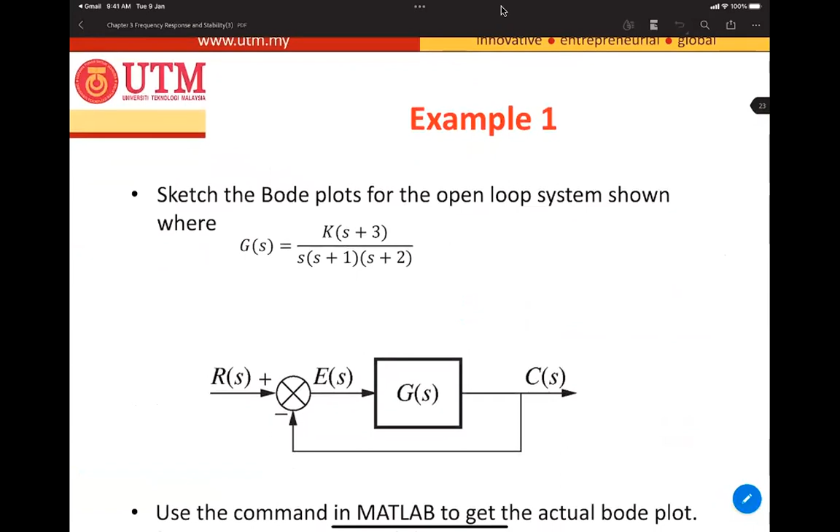Anyway, let's move to slide number 23. So these are examples of very open questions. You are given mathematical models as shown here, which is an open loop. Okay.

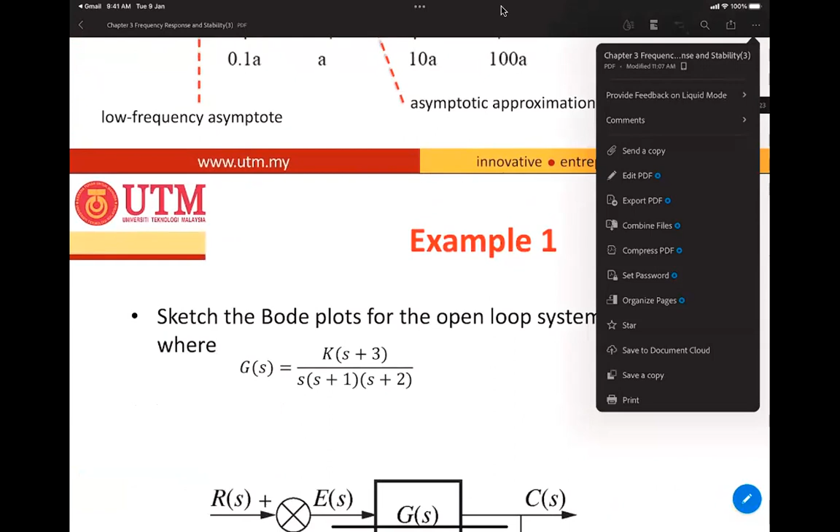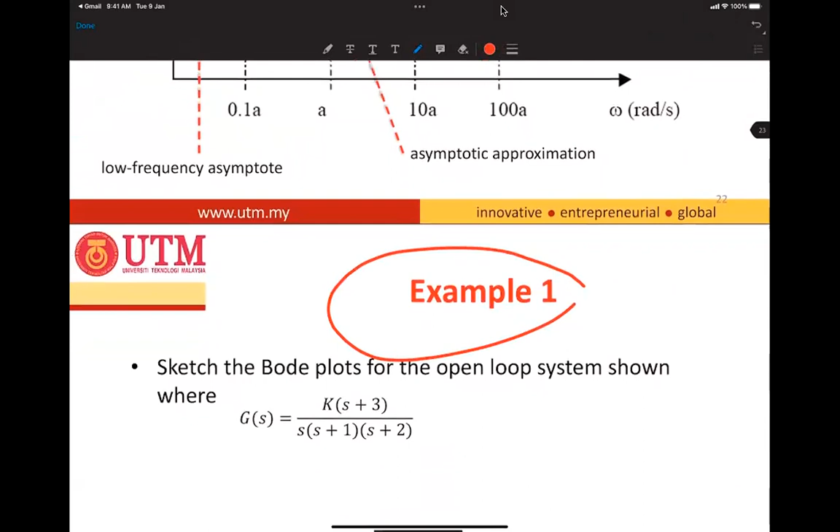Example 1. You can print the slide, or if you don't want to print, you can use your iPad or your phone, the last minimum resource that you have. So this is the open loop transfer function. Can you see behind me? Okay, clear.

We have open loop zeros at -3, and open loop poles at 0, -1, and -2. So look at the poles at the origin, it indicates system type 1.

System type 1, meaning the velocity error constant is kV, and the steady state error is 1/kV. So you must understand the concept when you're given open loop transfer functions.

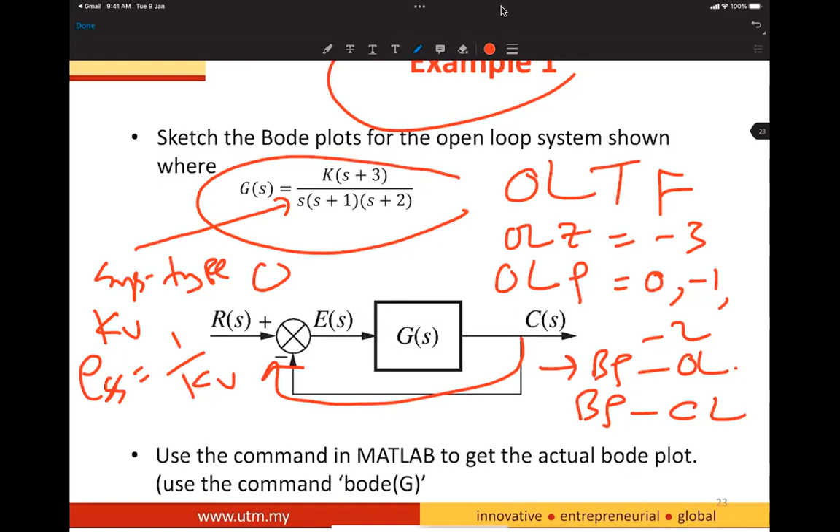We have two types: one is for open loop, the other for closed loop. Open loop will give 5 important pieces of information. Closed loop will give 3 important pieces of information.

So in the test and in the final exam, you are not required to plot the Bode plot. The Bode plot is given. If they ask you to plot it, it's just a sketch, a freehand draw. For example...

Sketch the Bode plot for the open loop transfer function below: 1 over s plus 10. Sketch, a simple one. Sketch means a freehand draw.

Sketch is not the same as draw. When the question asks you to draw, it means you have to use a full scale, a semi-log paper, which must be given. It's like a graph, like a linear graph, but it's not exactly a linear graph. We call it a semi-log paper.

Okay, this one is for draw. Sketch is a freehand draw, like this. That's why you can observe my handwriting, it's not nice because a doctor's handwriting is always not nice.

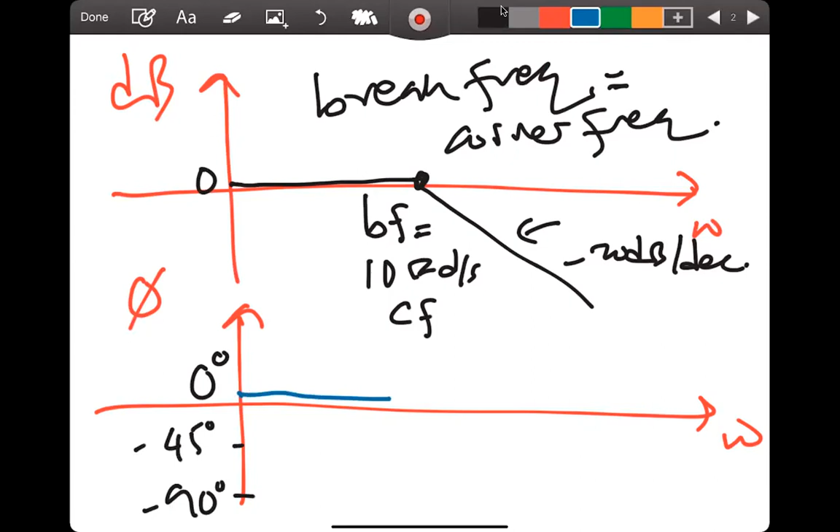But for the phase degree, so you plot 45 degrees, something like that, and then you choose another color. It goes like that, goes down like that, goes like that.

Corner frequency for phase is at minus 45 degrees at corner frequency 10 radian per second, and 1 decade before 10 radian per second is 1 radian per second, and 1 decade after 10 radian per second is 100 radian per second. Log scale. Frequency is log scale.

You can see it here. There's an empty table if you want. Right, that is a sketch.

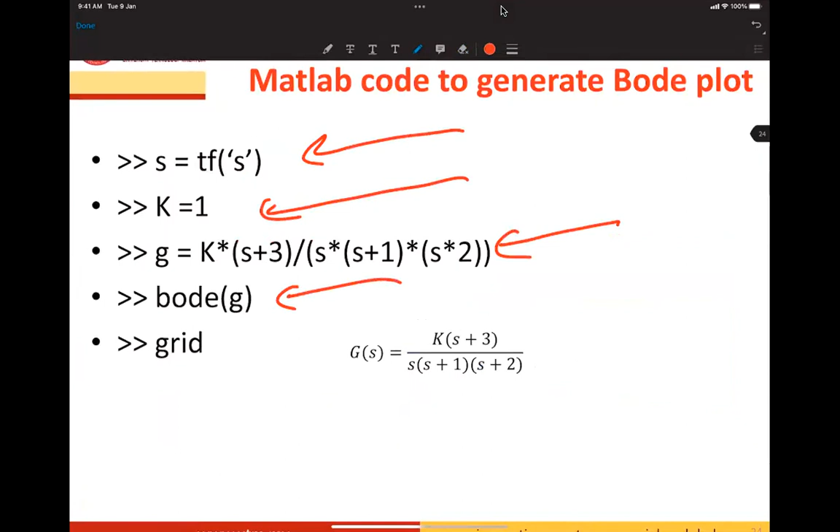So now you are given this plot. We plot it using the code. Assume k equal to 1. Then write the open loop transfer functions, and then call the function bode g and then grid for these open loop transfer functions. Then you get this.

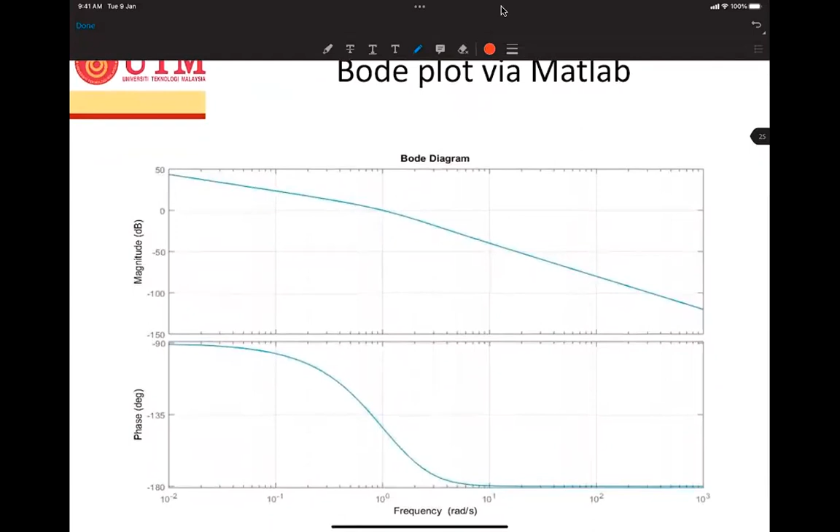So this is the bode plot for the open loop transfer function type 1. If the transfer function is type 0, the initial magnitude will be flat at 0 dB per decade.

But if the system is type 1, it is like this, the initial slope is minus 20 dB per decade. That is the tip: if the initial magnitude is flat, that is a system type 0. If the initial magnitude has a slope of minus 20 dB per decade, that is a type 1.

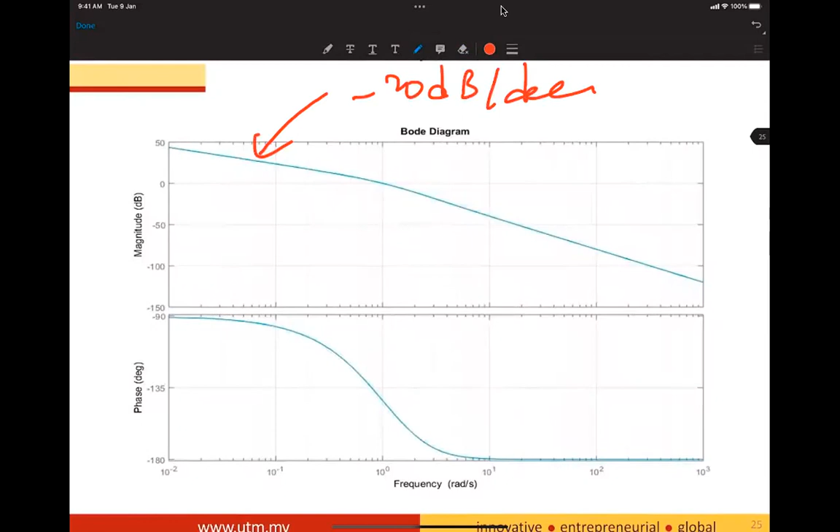But if the initial slope is like this, minus 40 dB per decade, that means this system is system type 2.

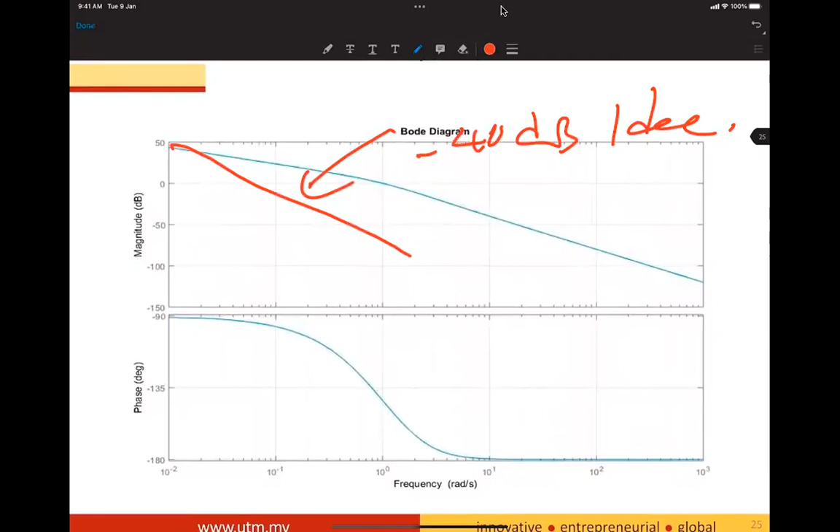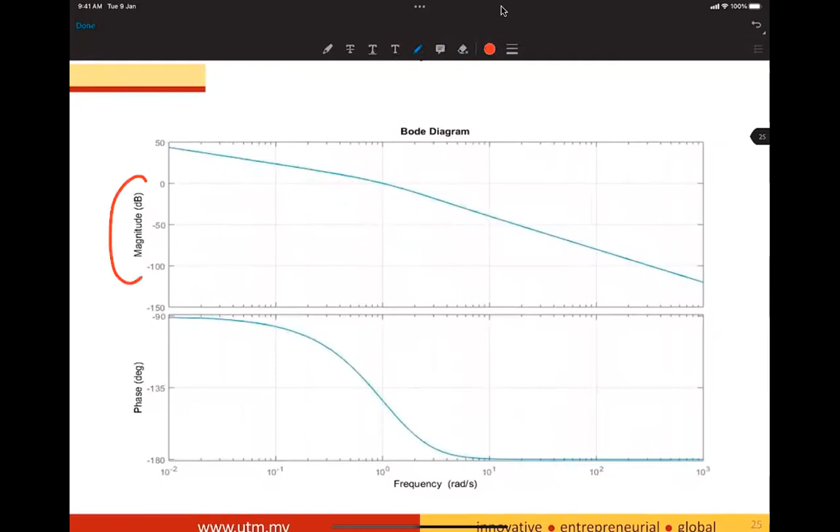Right, so this is the plot. Can see that it varies. So this is the magnitude in decibel, and this is the phase in degree.

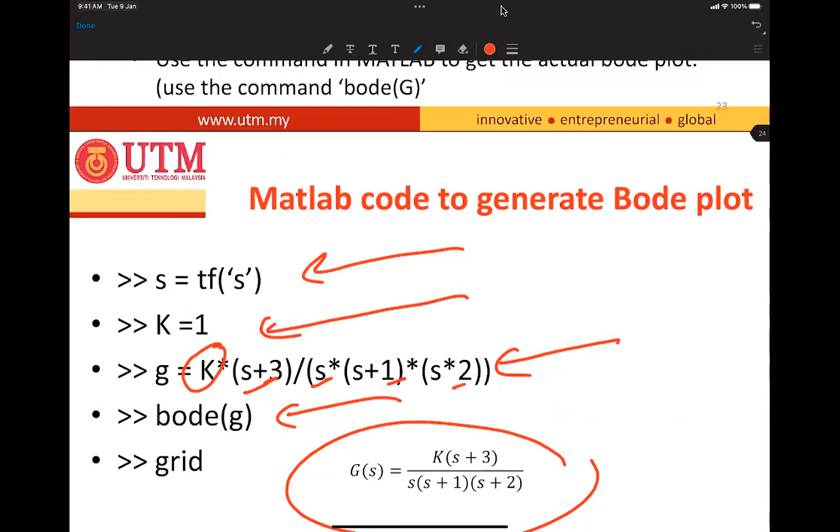So if you want to do it manually, you have to do it one by one. First, you plot the gain K, then you plot the zeros at -3, then you plot poles at the origin, then you plot -1, then you plot -2 poles. So at the end of the day, it will be crowded.

Crowded. When I was in undergraduate in the 1980s, we had to do it like this because we don't have facilities like sophisticated computers. So we had to draw, then add each one. Then suddenly the Board of Engineers gave an audit so that we don't have to plot, just give the bode plot and the student extracts the information from the given plot. So that is the trend now all over the world.

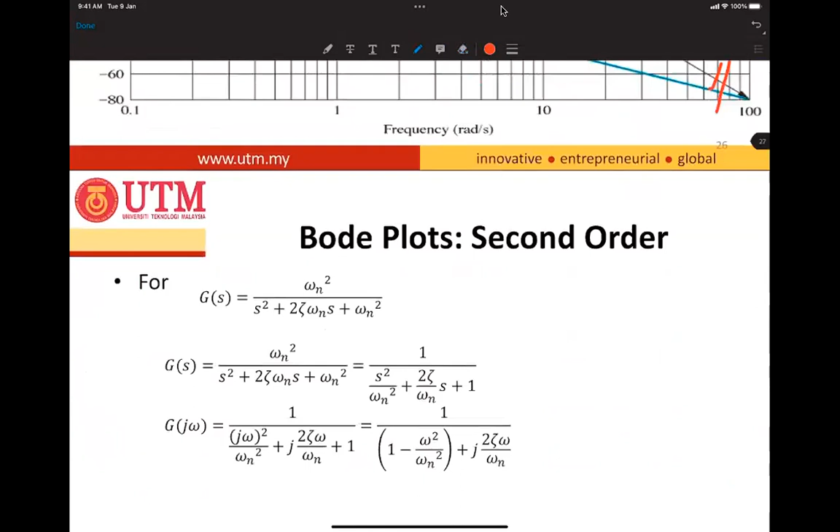So you don't have to plot like this. The plot is given, as shown here. Then you are required to do this, second order. Sorry, then this is the plot. Okay, the final plot.

So what do we get from the open loop transfer functions? Why don't we use Matlab so that we can see? So we go for Matlab. Have you installed Matlab in your laptop?

One minute. One. Then install Matlab. UTM license. So this is UTM license as well. It's not coming out.

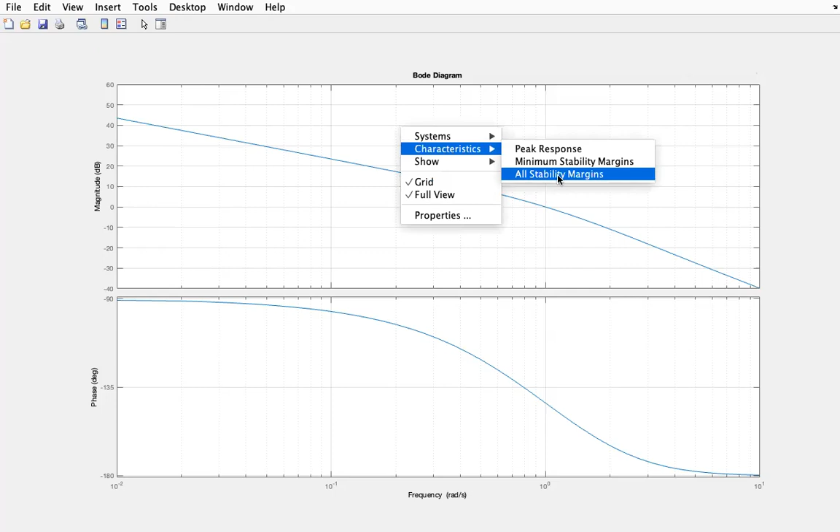Okay, so we go to the source code here. How do you get the closed loop frequency response from the source code? First, we have to find the closed loop transfer function. Let's say closed loop T equals... How to get a closed loop transfer function from the given open loop transfer function?

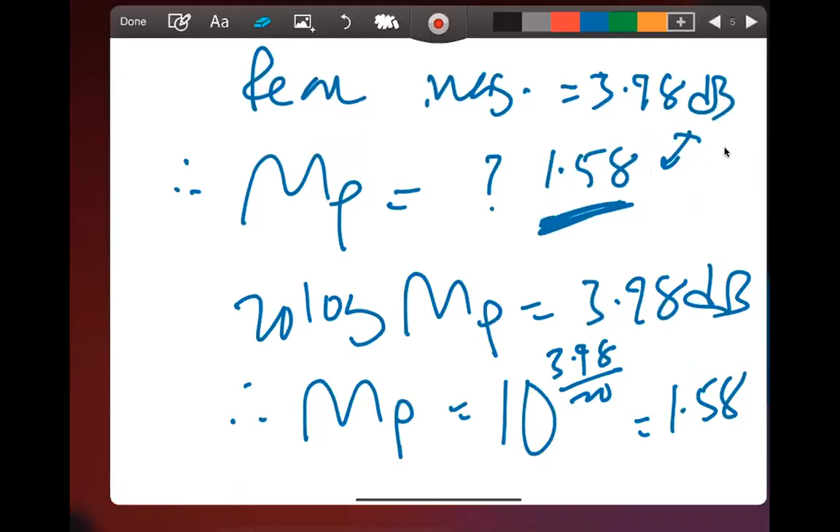Okay. And then can we go to the just now the plot? Mana plot tadi? Hilang. Mana plotnya tadi? Can you see the plot? Window. Tu, figure 1. Okay.

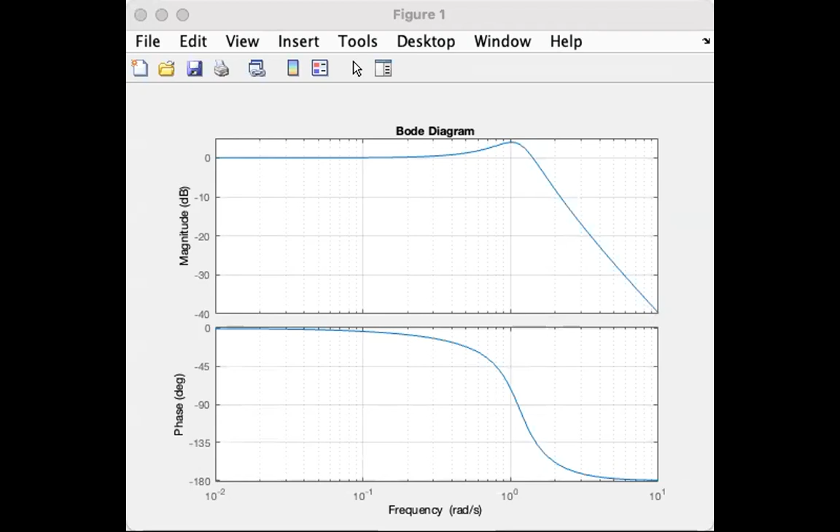Okay, the peak frequency, success, magnitude peak, success, and the last one, bandwidth at minus 3 decibel. How do we get bandwidth at minus 3 decibels from the open loop transfer function?

Minus 2.99 is minus 3 decibel, and what is the frequency there? 1.61. So the bandwidth is 1.61 radian per second.

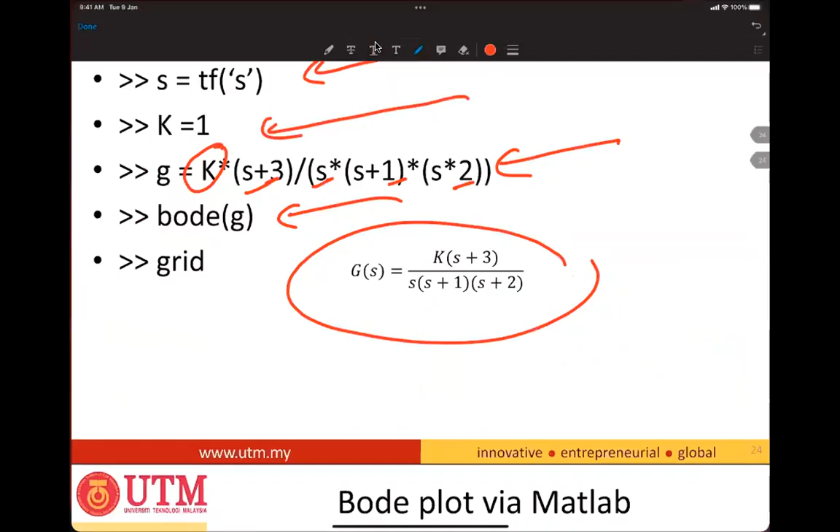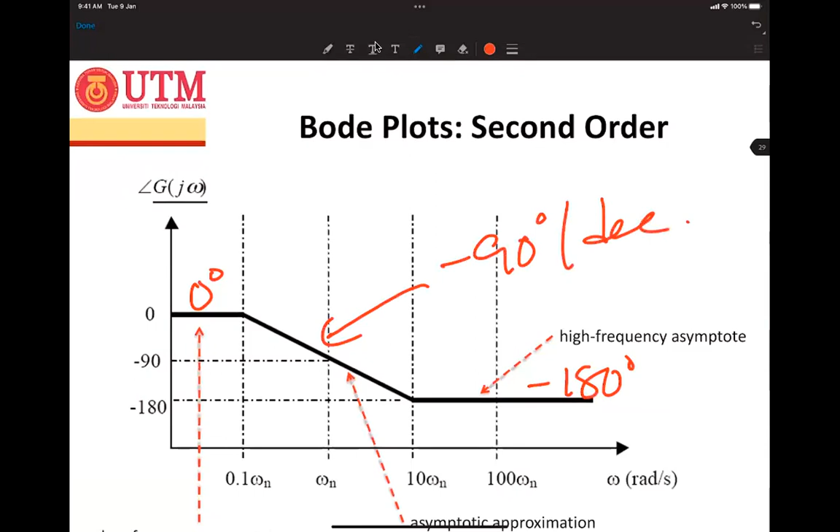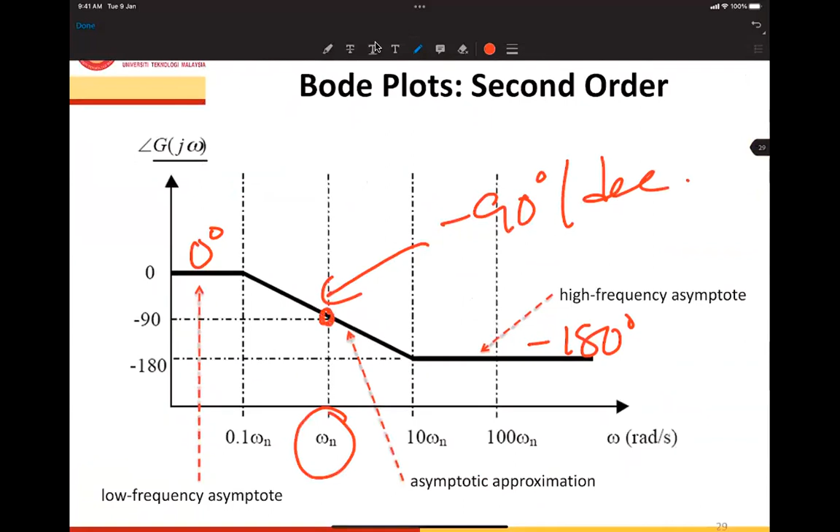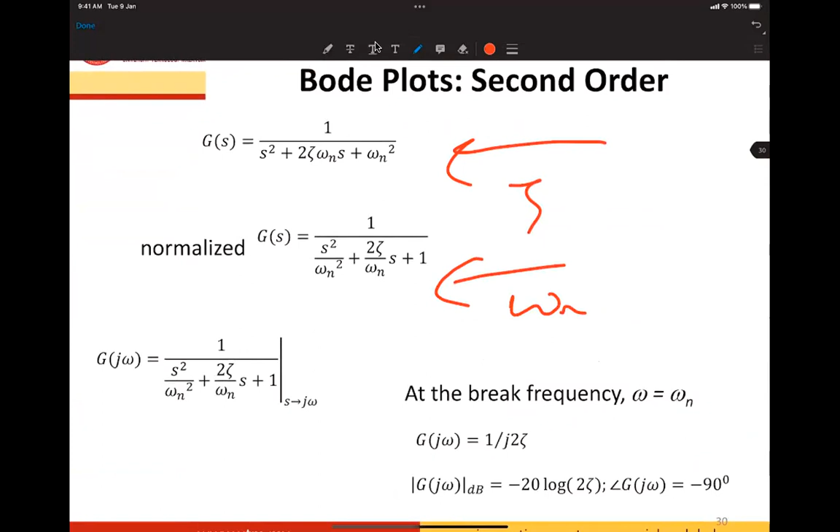Okay, the second order is here. This one I discussed already last week. It starts from 0 and then goes down by minus 40 dB per decade, similar to the phase. First at 0 degrees, settling down at minus 180 degrees, with a slope of minus 90 degrees per decade. At the corner frequency omega n, the phase is minus 90 degrees. So these are examples because in second order we have zeta and omega n - the damping ratio zeta and the natural frequency omega n - and it varies from 0.1 until 1.5. The best response in a control system is zeta equal to 0.707, and the phase as well.

give me one second order open loop transfer functions, complex conjugate pole. Give me one sample. Ahmad Tariq Sufyan Khalid. Ahmad Tariq Sufyan Khalid. Arab brothers. Arab brothers. Ahmad Tariq Sufyan Khalid. Tak datang? Sorry? Oh, exam. Imtihan. Imtihan. Imtihan. Ahmad Amir Zafran. Amir Zafran.

Give me one complex conjugate open loop pole. Amir, give me the omega n frequency from this complex conjugate pole. Square root of 6, square root of 6, which is 2.449. Amir Zafran, zeta is 0.41.

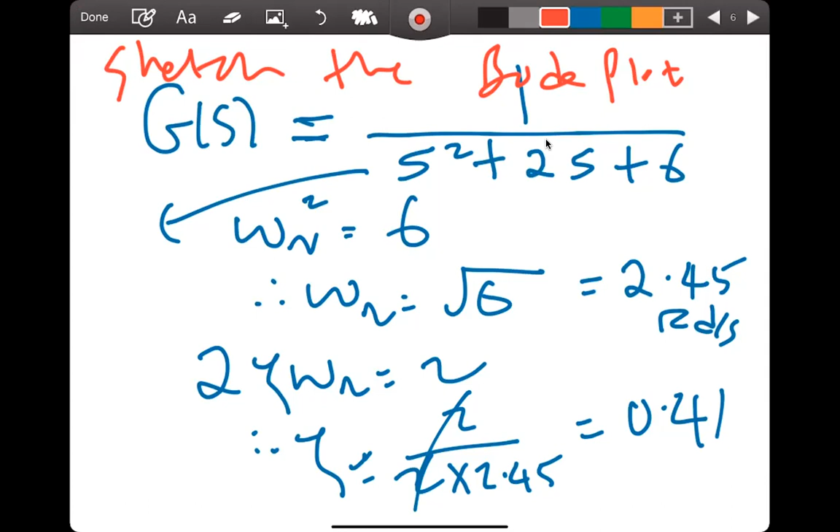Phase. How do you draw the phase? Not my face, the phase of the Bode plot. Don't draw my face, because I have permanent hair damage. Do not draw my face.

Okay, phase. This one is related to the complex conjugate poles. Complex conjugate poles.

Over here, phase. What is the corner frequency? Okay, 1 decade before, 1 decade after.

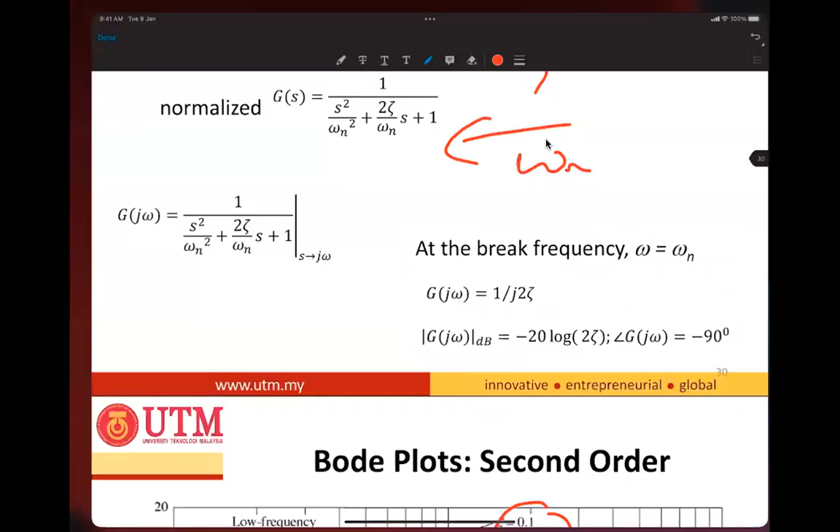Okay. Look. Okay, how do I imagine? Is it minus 90 degrees? From the notes that I gave to you. This one, okay, this one is a standard graph.

Standard graph, and our zeta is... our zeta is 0.41, so you see the graph between 0.3 and 0.5. This is zeta 0.3, this is zeta 0.5, so it's in between. Okay, it's okay, this one okay for the phase, for the magnitude.

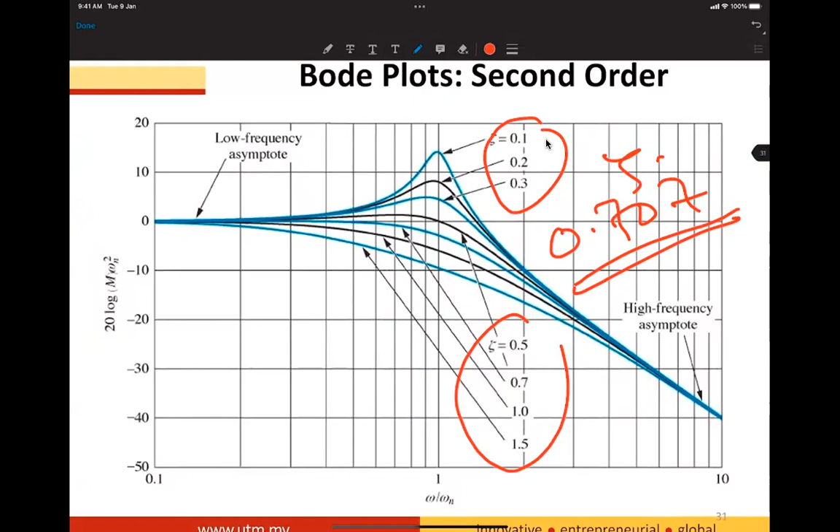Corner frequency, the one that we discussed, 2.45, 2.45, yeah, this one is...

Just want to test whether the students are sleeping or not sleeping in my class. Okay, any question? Any question? Last one, last one.

If given open loop transfer function, sketch the open loop Bode plot.

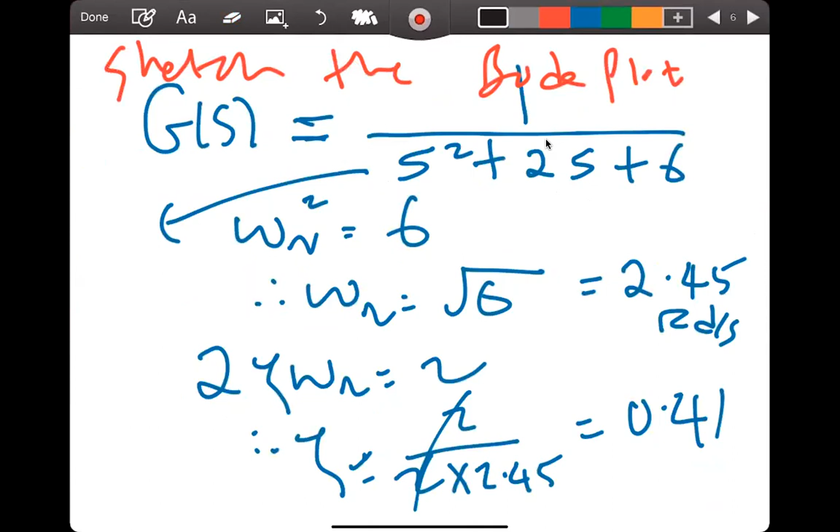Previously this one was complex conjugate zeros, but now I don't give complex conjugate zeros — sorry, previously complex conjugate poles, but now I change to complex conjugate zeros. Okay, what is the value of the complex conjugate zeros?

Abdul Rahman Ludin. Abdul Rahman. Adam. What is the value of the complex conjugate zeros? S squared plus 2s plus 6.

Yeah, square root 6, what is it? Square root 6. 2 point. Okay.

Make the sketch, open loop Bode plot, sketch. So the idea or tip, there is a reverse from the first one, reverse from the complex conjugate poles. Reverse.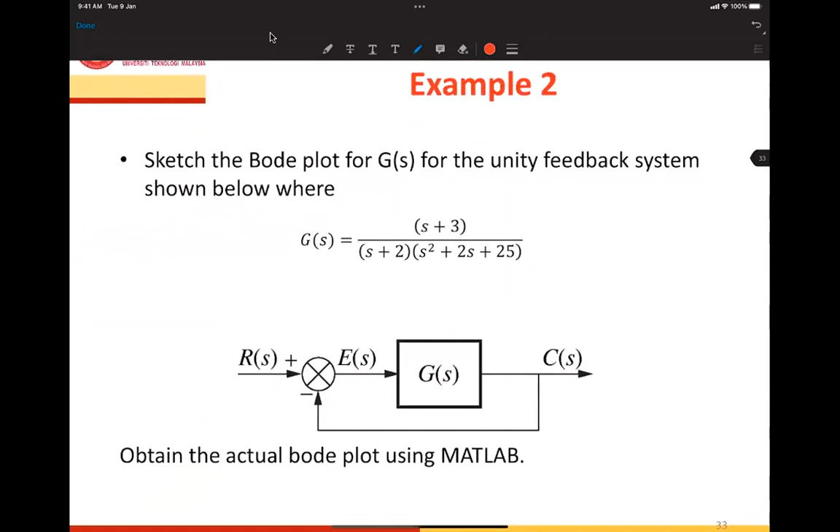Okay, we move to example 2, where you are given open loop transfer functions. This time around, the open loop zero is at -3. Open loop poles are at -2, and we have complex conjugate poles.

Felix Erickson. Who is Felix Erickson? Ismail, complex conjugate poles values, please.

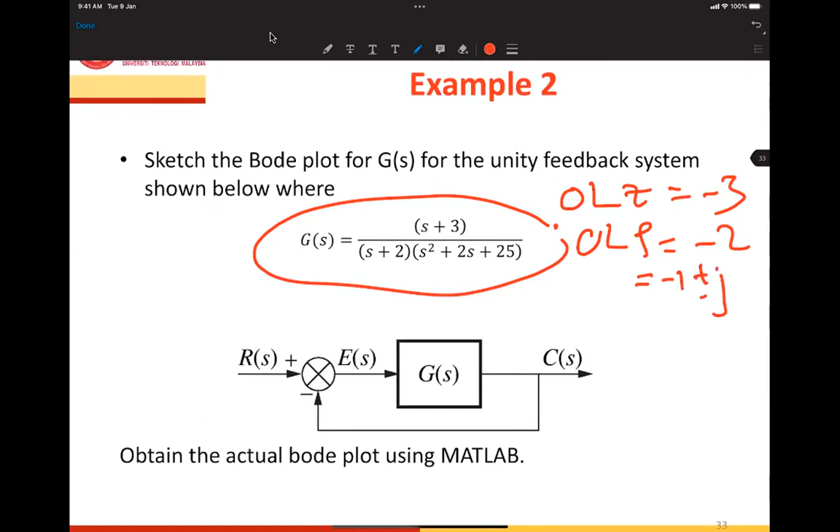Right, so draw the open loop bode plot. For the complex conjugate poles, omega n is 5 radians per second, and zeta is 0.2.

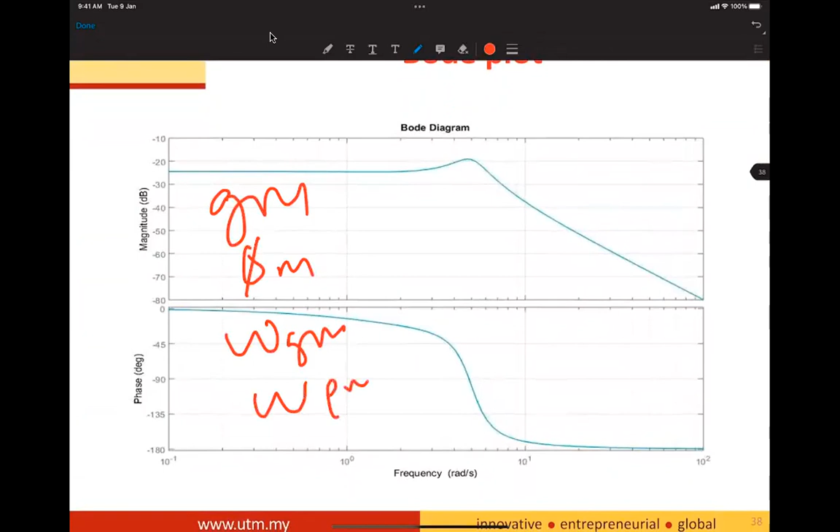So you are going to find the gain margin, phase margin, omega GM and omega PM, plus stability. Let's plot.

Ivan, where is Ivan? Source code, please. No need ma, S is already defined. See, if you don't trust me, S is already defined, no need to define again. G, S plus 3.

Okay, thank you. Bode, G, grid. Okay, and share the screen. Bigger - can you see?

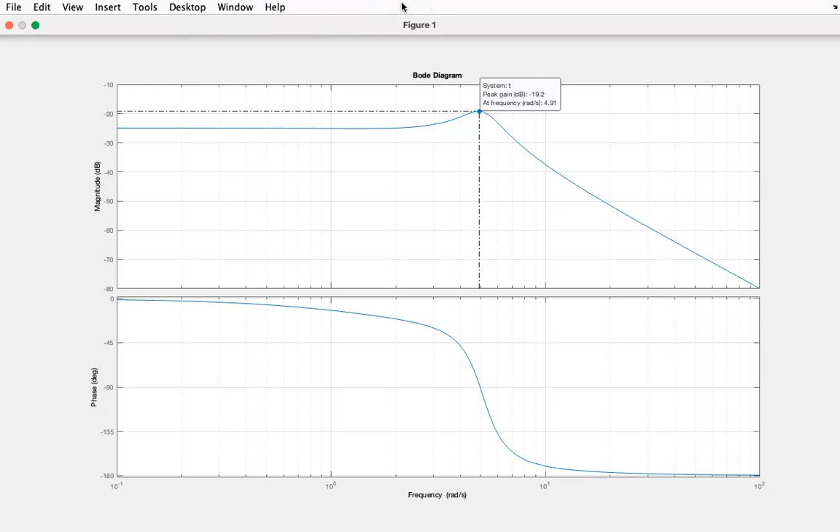What is the value of MP? MP.

And Liana, advise me how you find the bandwidth from the closed loop transfer functions bode plot.

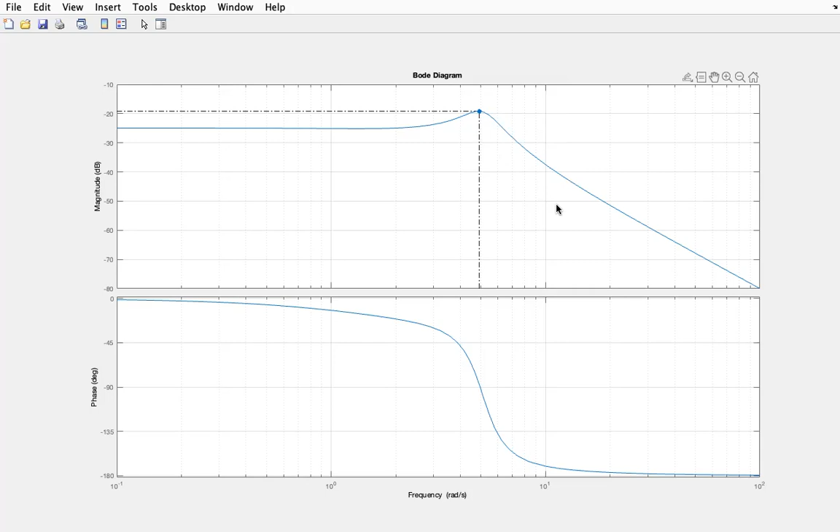Minus 19.2 is the 0 decibels, and then you reduce by -3. So meaning that minus 19.2 plus -3 is minus 22.2.

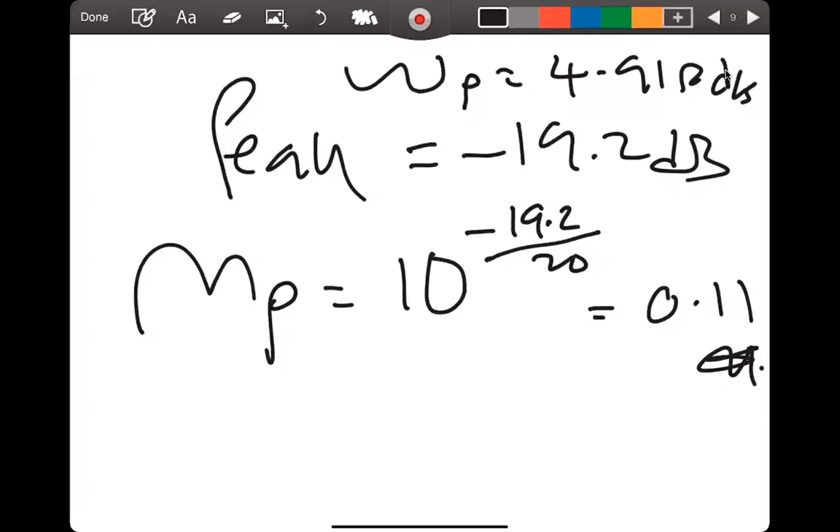Okay, we move to the next one - stability via bode plots. So I already exposed to you what is the gain margin, the phase margin, omega phase margin, omega gain margin, and stability status.

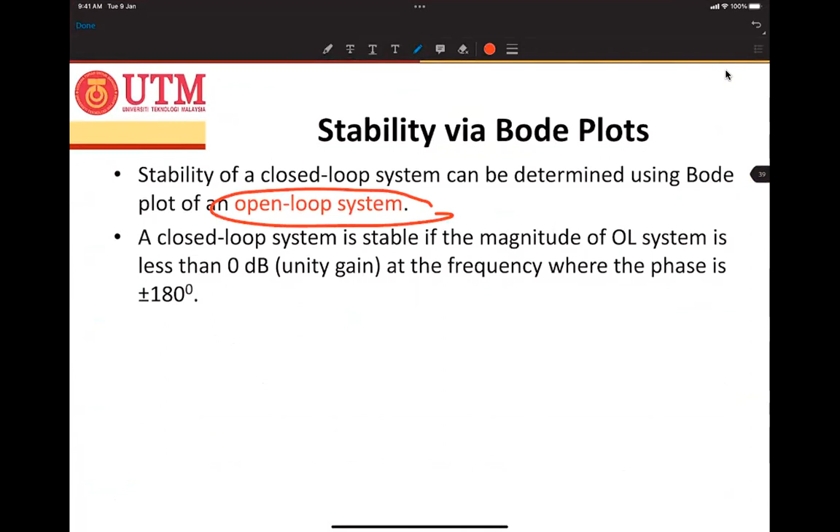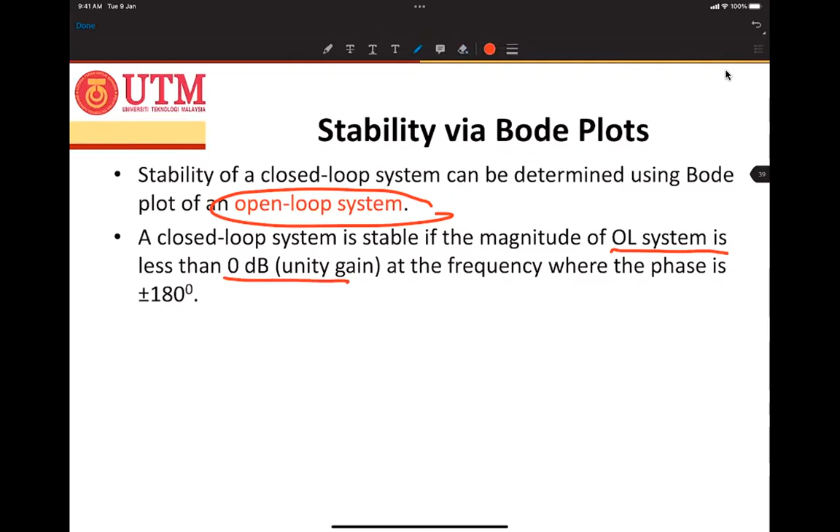So what is it? Stability of a closed loop system can be determined using the bode plot of the open loop system. As I told you before, a closed loop system is stable if the magnitude of the open loop system is less than 0 decibel or unity gain at the frequency where the phase is plus or minus 180 degrees.

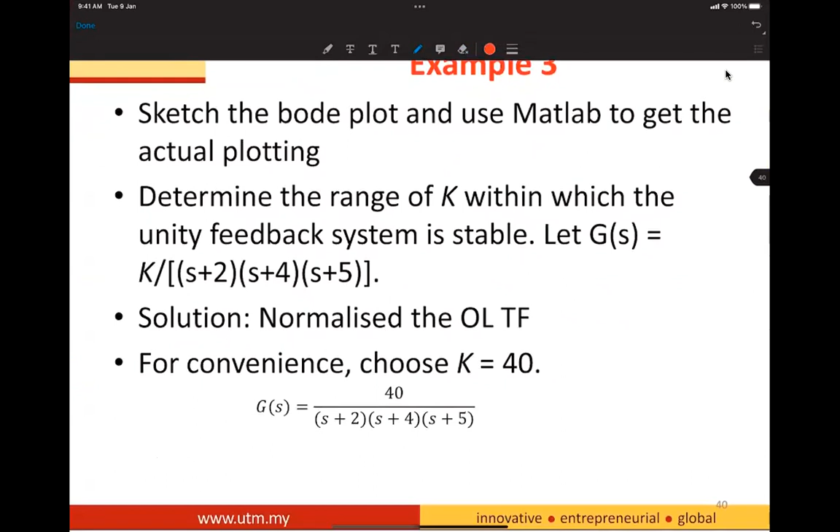So you are given here open loop transfer function K over (S plus 2)(S plus 4)(S plus 5). Okay, so the plot is given here.

And then look at the response - the gain margin there, 19.5, this margin. It is a 0 minus 19.5, positive 19.5 decibel. So that's how we get the value of the gain margin.

Where actually is the gain margin? The gain margin occurred when the phase crosses at minus 180 degrees. Where is minus 180 degrees? It's here. What is the value of this frequency?

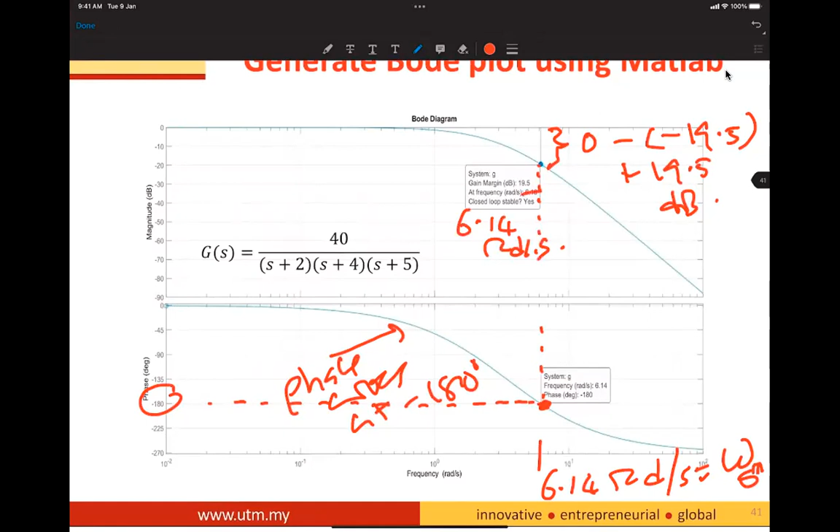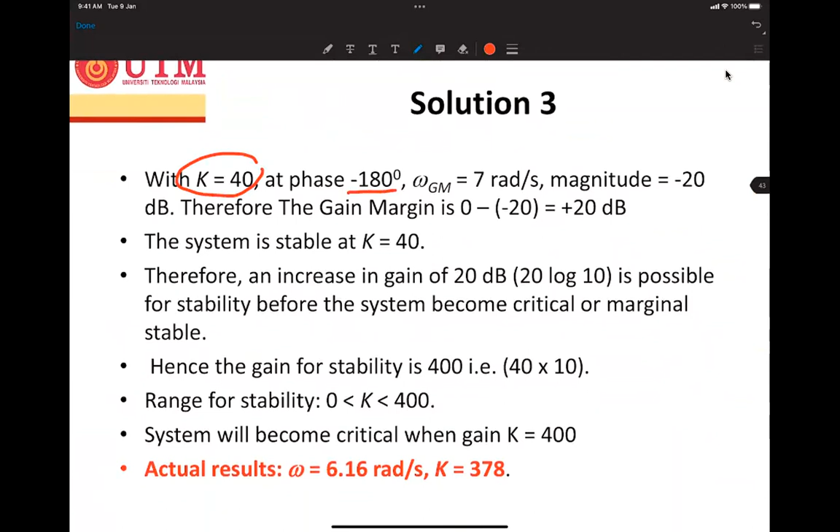Okay, let's continue. So that is the omega gain margin. With K equal to 40, phase minus 180 degrees, the omega gain margin is 7 radian per second. This one is from the book. This one is 6.14, also acceptable. Don't worry, also fine - like your answer in your test, I already marked about half of it.

So the dominant pole value is different, but in the acceptable range, so full marks. The dominant pole is -1 plus J1. But if the dominant pole is -10 plus J10, it's wrong - too far.

Magnitude -20 decibels. The one that we get is 19.5. Why is it different? Okay, why different?

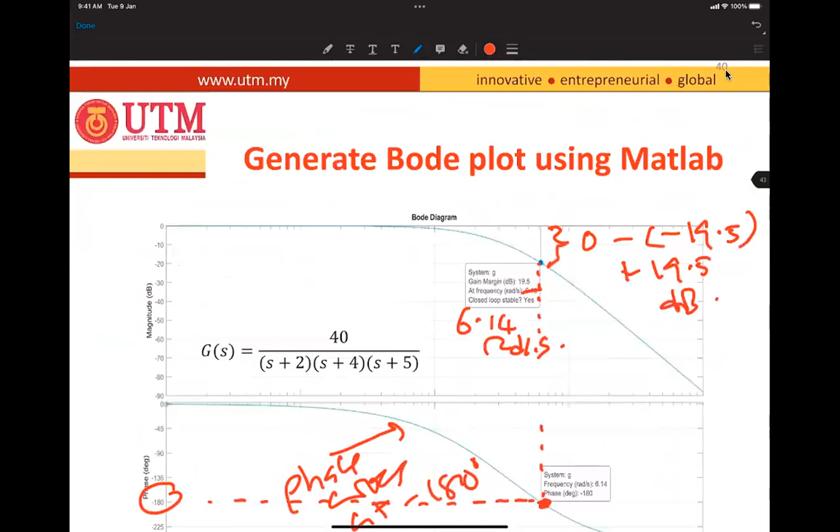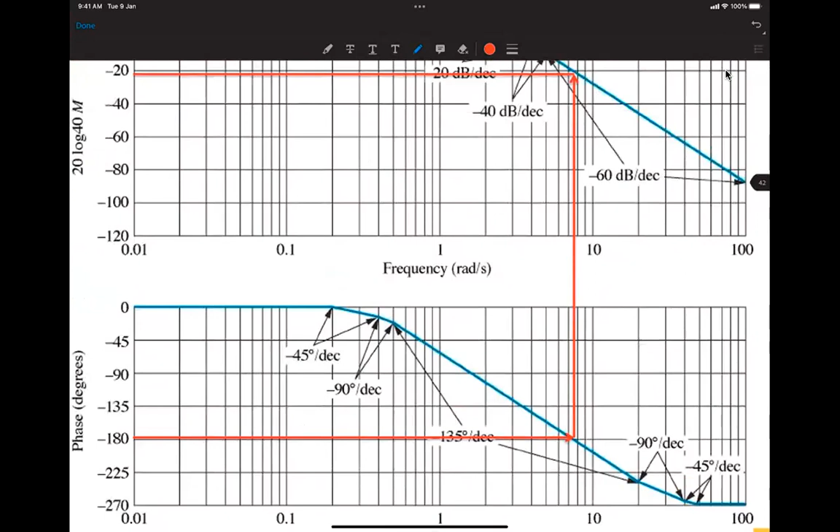Because in Bode plots we have two styles of plotting. One is using straight line approximation - in Malay, penghampiran garis lurus. The second one is using real point by computer simulations. The one we get here is real point computer simulation using Matlab, while the other is using the straight line approximation, but both answers are acceptable.

So therefore the gain margin is 0 minus -20, equal to plus 20 decibel. And the system is stable at K equal to 40 due to positive gain margin. If the gain margin is positive, if the phase margin is positive, the system is stable. If the gain margin is negative, the phase margin is negative, the system is unstable. If the gain margin is 0 decibel, if the phase margin is 0 degree, and omega gain margin equals omega phase margin, the system is marginally stable or critical.

Therefore we increase the gain - it's possible for stability, or marginal stable. So let's say instead of 40 we increase the gain to 378.

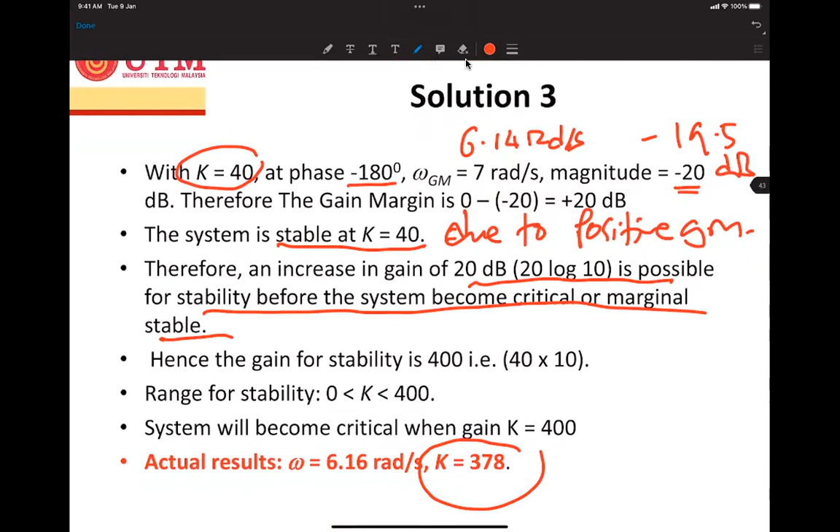First we write the code. So what is the code?

Mahmud? Not present. Muhammad Said Traore? The Sadio Mane brothers. Congratulations, you win the FA Cup. Quite amazing.

Source code, please. Source code. Let's call it G, open loop: 40 over S plus 2, S plus 4, S plus 5.

Then bode G, and then grid, and then share.

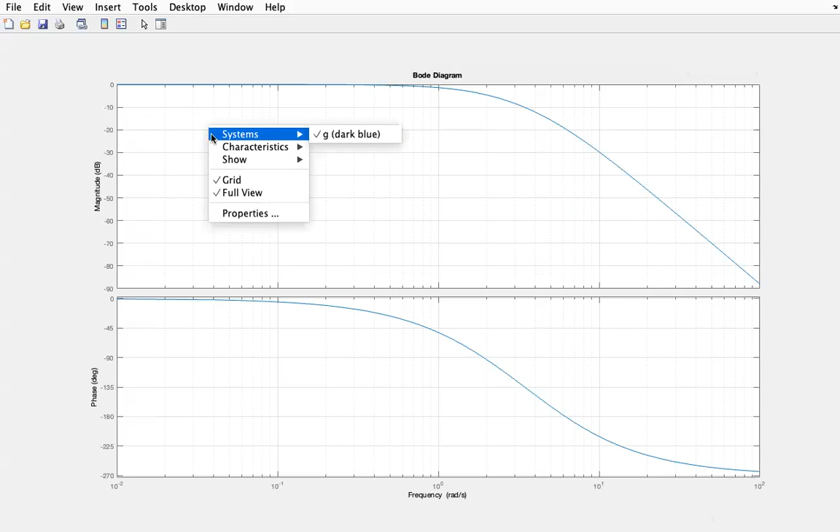Matthew? Right click. There you go. Okay, gain margin - same, 19.5 decibel. Omega gain margin 6.16, where the phase crosses at minus 180. Here - minus 180.

Minus 180, 6.17 radian per second. The omega gain margin is 6.16 or 6.17, both can be accepted. The omega gain margin occurs at the phase curve crossing minus 180. Understand? Where is minus 180?

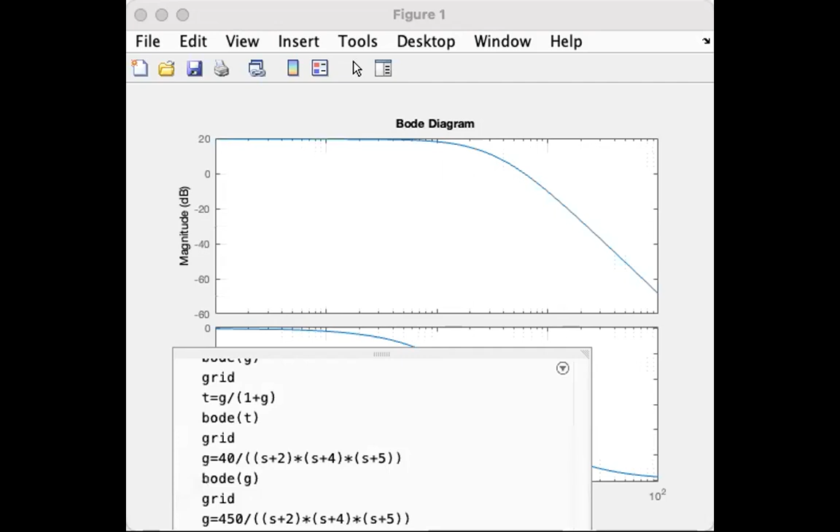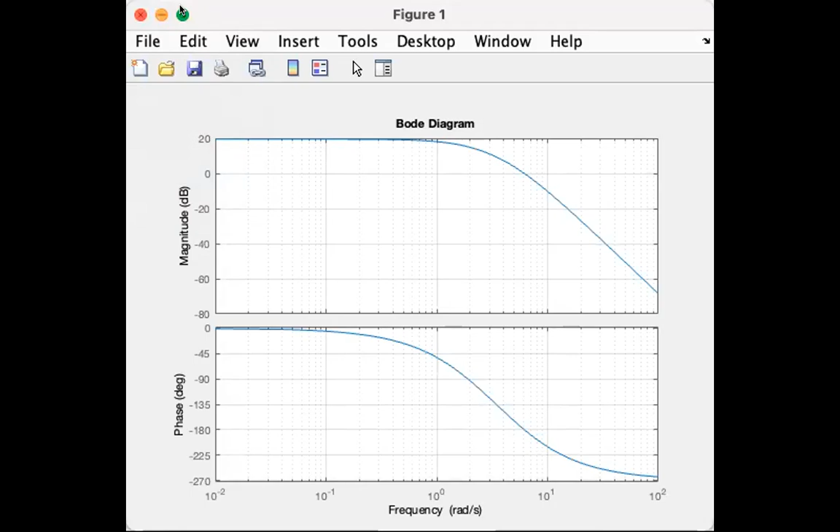Okay, listen. Okay, right click. Can you read between the lines? Can you observe something?

Aina Wahida, can you observe something? Your gain margin, please, Wahida. Zero where? Zero decibel. Omega phase margin. Phase margin. Zero. Gain margin 0 dB, phase margin 0 degree.

Omega phase margin? 6.16 radian per second. Omega gain margin? Omega phase margin 6.16 radian per second. Omega gain margin 6.16 radian per second. Gain margin 0 decibel, phase margin 0 degree.